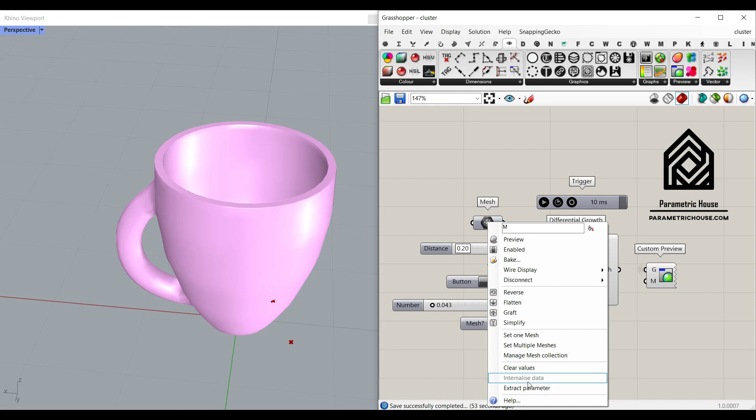In this Grasshopper tutorial, I want to show you how you can make a differential growth pattern on a mesh. So for example, this is the base mesh I'm using, which you can see is this cup. I have right-clicked and internalized this, so this is completely inside Grasshopper. So what I have to do is to connect the trigger to this differential growth and let it grow. As you can see here, it's going to produce the differential growth pattern.

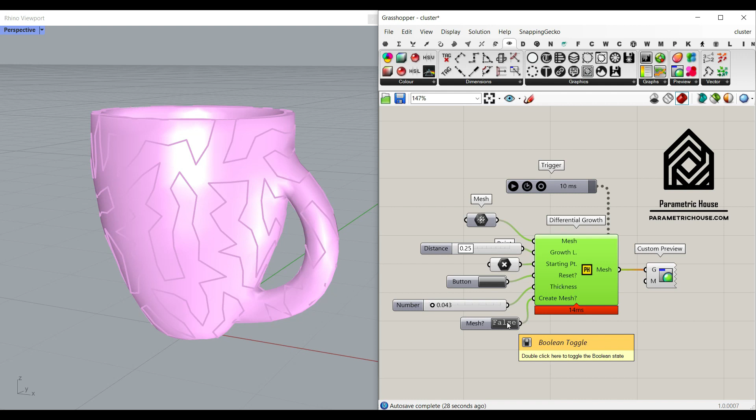I'm going to explain how we're going to use the plugins to produce this on the mesh. And whenever we are okay with the pattern, we can increase or decrease the distance. We can pause the simulation and set the mesh to true. Before that, we can also control the thickness here. So I'm going to put that to true.

And here you can see that I have the final mesh. I can bake that and use that in Rhino. If I go to the rendered mode, you can see that this is the final result. Okay, let's get started from scratch.

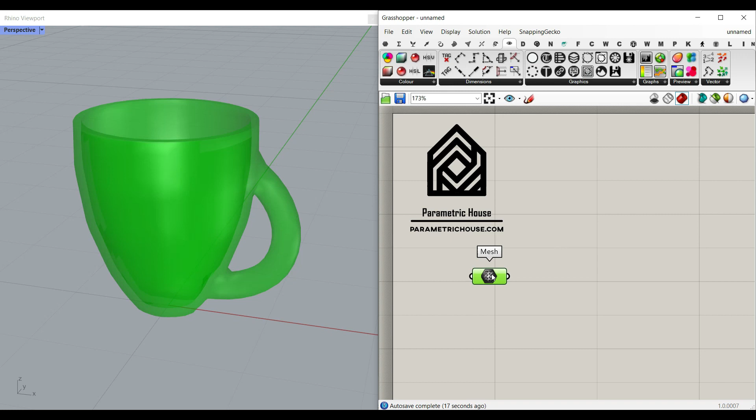First, what I want to do is to use a predefined mesh. So you can see that I have used this mesh. If you want to see the mesh better, you can simply go to the display and use this custom preview to give it a little bit of a material.

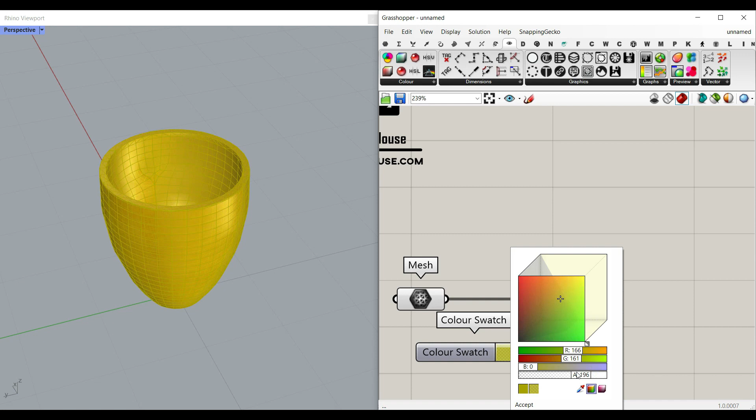You can also use the swatch to give it a color, for example, maybe yellow, and you can also change the transparency if you want to. So that's also going to help you to see the mesh better. So if I turn it off, you can see the default color, and here we have the custom preview.

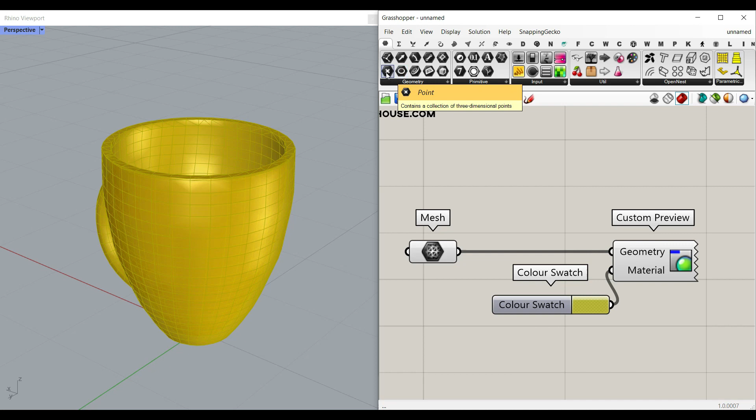Okay, before we start the pattern, what we have to define is a series of points, which is going to define the starting point of the pattern. I'm going to go to the params menu and select a point. For the point, I'm going to just right click and set one point, turn around my mesh and use the Ctrl key to bring it a little bit up. And this one point is going to be the start point of the pattern.